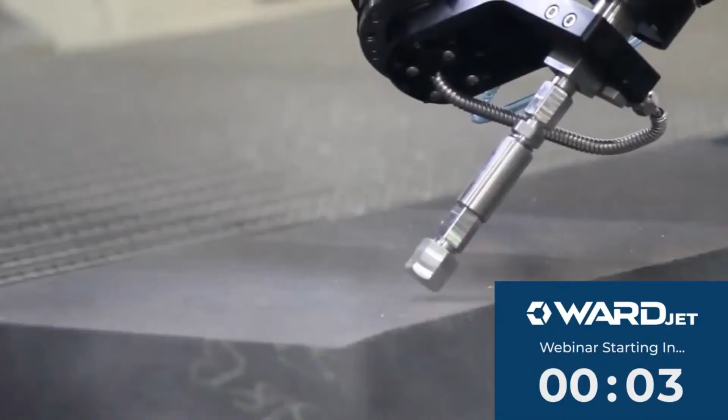Today's webinar is on WARDJET APEX-90, our most advanced bevel cutting solution designed for manufacturers dealing with steep angles, complex geometries, or demanding applications that push beyond the limits of traditional water jet cutting. Over the next 45 minutes or so, we're going to talk about what makes APEX-90 unique, where it fits in real-world manufacturing environments, and how it can help customers expand their cutting capabilities.

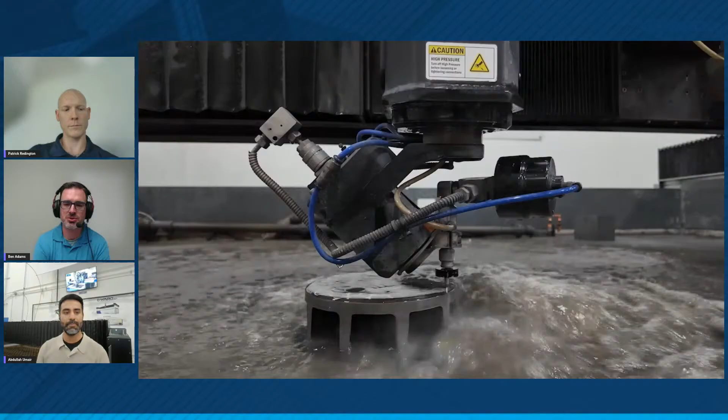So Ben, let's begin with the basics. For those who may not know, what exactly is APEX-90, and what challenge was WARDJET trying to solve when it was developed? We've done a number of 5-axis mechanisms. The APEX-90 is our most recent one for our most challenging applications. Over the years we've had a lot of generations. We occasionally on older systems would struggle with reach and parts that were large and had real tight angle cuts. The APEX-90 is our answer to that challenge.

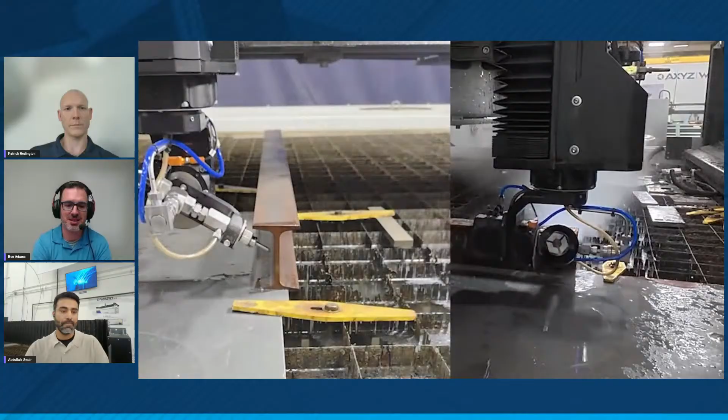So there it is on screen. APEX-90 can do a full 90-degree cut, so it can cut horizontally. It's available on carriages with extra throws, so you've got extra tall parts. If you have overhung parts, you got to get underneath the flange. The APEX-90 is uniquely designed to reach into those hard-to-reach places and cut things that none of our other heads, and a lot of heads in the industry, just can't reach.

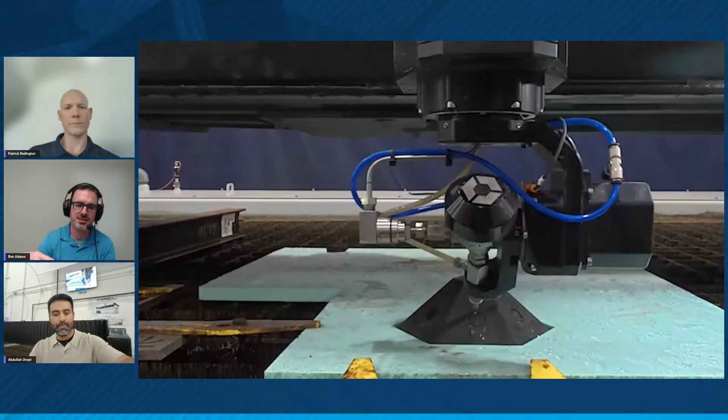You mentioned it's capable of cutting angles up to 90. Does that have any implications on the work envelope? It does. The APEX-90 is unique among our 5-axis heads in that it's got a wrist pivot, so it will pivot the cutting head out. When you get all the way over the edge of the travel and want to pivot back into the work envelope, there's about a 6-inch zone where the tip of your nozzle is now 6 inches towards the middle of the machine. So unlike an APEX-60, where you don't really need to think about it, you'll need to make sure you have a little room around the edges so you don't mount your part all the way to the edge where you can't get all the way around it. Generally, you're going to want parts more centered on your table for an APEX-90 application.

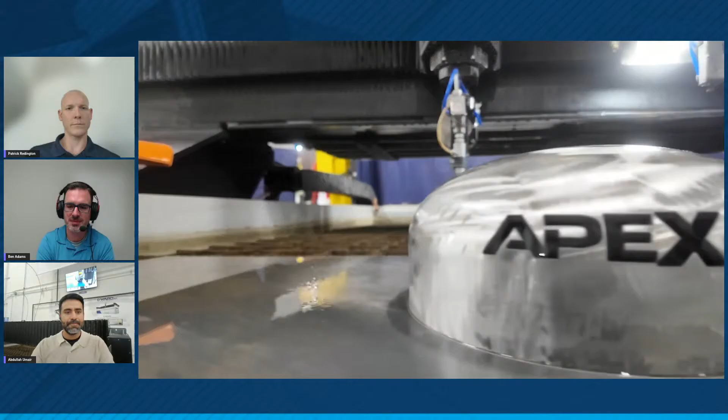So which machines is it available on, what series? The APEX-90 is on any of our M-Series machines, from the 2.5 by 2 meter small ones all the way up to a giant 15 meter long machine by 4 meters wide. Any of those can take APEX-90, and they can be stretched vertically as well if you have an extra tall part, or maybe a mold trim application where you need to get underneath a part larger than your normal 12 inches.

So customers who currently possess M-Series, can they retrofit an APEX-90 on? Yeah, absolutely they could. We would talk about your application, because it generally takes more Z travel to reach your parts. We would come out with a carriage and talk to you about lifting your gantry up a little bit to make sure we can reach all of the part you need to reach. So you might need a 6-inch lift kit or so if you take off a normal 2D cutting head and want to go to an APEX-90, but that's easily done.

So as a product manager and engineering manager, what applications immediately come to your mind when somebody asks for APEX-90?

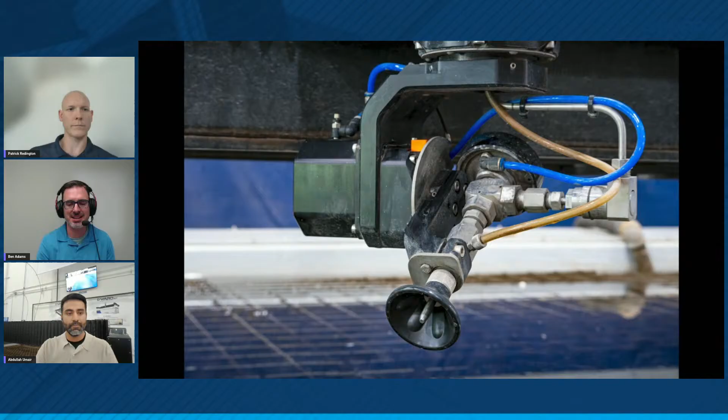So often these fit a few areas. Aerospace is popular, military applications, defense. There's a lot of parts there, castings, large metal parts. Also, I mentioned earlier mold trim. If you're demolding a part, you've got some flash, maybe some complicated mold lines that hit all sorts of odd angles, and you need to get over to 90 degrees in part of it, or reach inside some tough to reach places. A lot of mold trim applications are popular as well.

As we all know, cutting with WaterJet there's a little bit of taper. Is it capable of taper angle comps or tack? It is, yeah. It'll hit any angle from plus or minus 90 degrees, so if you wanted just a slight angle for taper comp, it'll do that, yes.

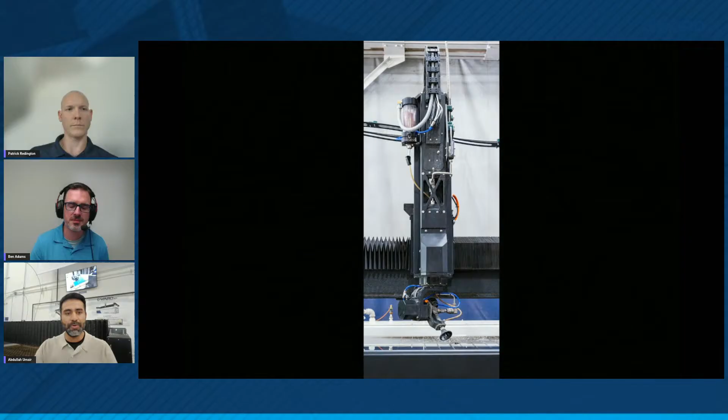Our audience may compare APEX-90 with APEX-60 or Infinite Winder. How do you differentiate those? So the Infinite Winder is a previous generation. Those applications are largely replaced by the APEX-60, which we're currently offering. The APEX-60 head is designed specifically to do taper compensation and bevel cutting on flat plate.

So it doesn't have that wrist pivot, right? It doesn't have any of the lost motion. There's an image - so you don't have to think at all about your work envelope. And it's great in those applications, but because it doesn't have that wrist pivot, it can't reach some of those hard to reach places. So the APEX-90 covers everything that the APEX-60 doesn't. If you need to go past 60 degrees, or you've got a part that you just don't have the reach you need on the APEX-60, the APEX-90 is the way to go.

Very nice. Patrick, would you like to add to that?

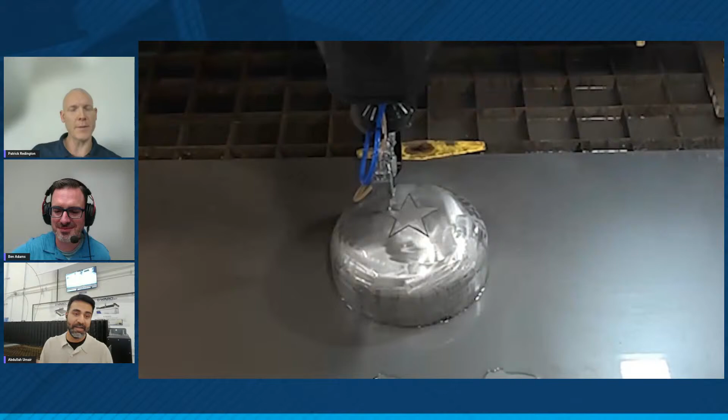So really, obviously the differences between 90 and 60, it's really going to be application specific. I really think the question is going to be either what you are currently doing in-house, as well as what capability is needed. Bringing a WaterJet in-house in general can be advantageous in a lot of different ways to either innovate your current process as well as bring in new parts. And with that, when you're going into 5-axis as well, it really opens up the door for a lot of different options. We have a lot of customers who bring WaterJets in-house, bring 5-axis WaterJets in-house. And I think going with the 90 versus the 60, or vice versa, is just really a question of what you're currently doing, what your current needs are, and what you want to do in the future.

All right, that really clarifies the innovation behind it. So Patrick, now Ben has walked us through what really APEX-90 is. Tell me, how would you position it with a customer, someone who's looking for 5-axis capabilities? How would you start a conversation on that?

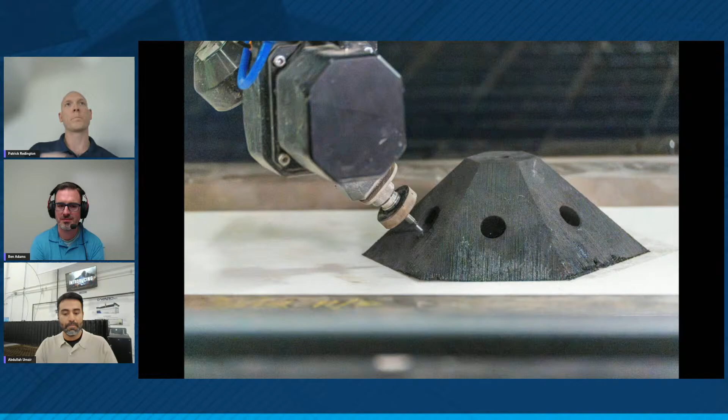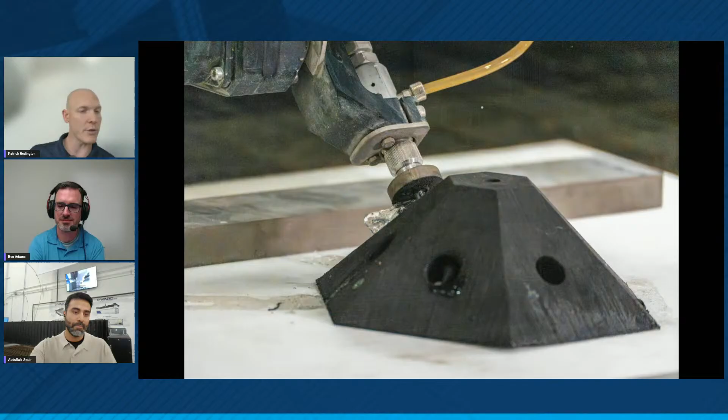Well, really, if you're looking for a 5-axis: one, do you currently have a part that you need a 5-axis for? Two, what's the angle that you need for the 5-axis? And three, what are you trying to do with the machine? Are you looking to specifically get into a niche where you're going to need 90 degrees, or you currently have a product that you need 90 degrees versus 60 degrees? And I guess the real question is, what are you cutting? What do you need to be cutting? And where are you trying to go with it again?

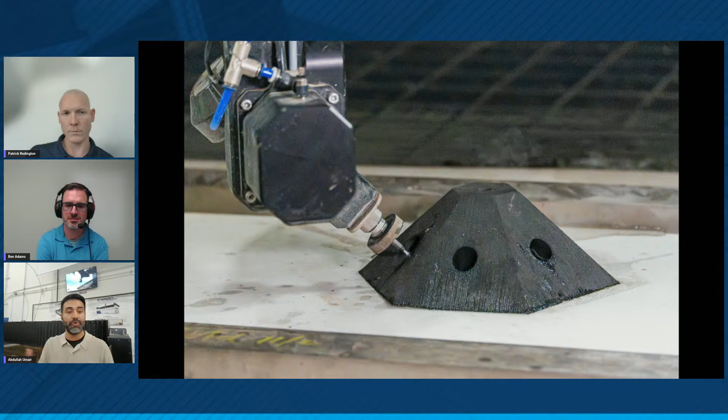So do you see on the field, talking to customers, people purchasing APEX-90 for their existing or current workflows, or are they looking to future-proof their business? Just kind of prepare themselves for more complex jobs down the road.

I'd say it's about a 50-50 split. We currently have customers who have innovated their in-house process already by adding an APEX-90. For instance, Ben touched on a little bit earlier about stamping and molding, oil pans - there's a lot of places that over the years a WaterJet head couldn't get into to cut at 90 degrees. So we have quite a few customers that do that currently with our heads at 90 degrees. And then, yeah, there are a lot of customers who are looking to bring stuff in-house, currently bidding on jobs or have recently won a job that needs the capability of cutting 90 degrees.

All right, so I've also asked this question already.

I've posed this question to Ben, but I want to get your insight as well from a sales perspective. Which industries are more gravitated towards the Apex 90?

I'd say the three big ones right now that I'm seeing are aerospace, defense in general, just because it's a very long list of parts that they need to cut with a lot of different varieties of materials, and automotive. Automotive has a lot of odd shaped parts, whether it's oil pans coming off a press or a stamp. With that specific application, they need a small compact head to get inside of the pan to cut the holes they need in the molds. That's also a very large one for 90 degree capability—there's a lot of car parts that need that capability.

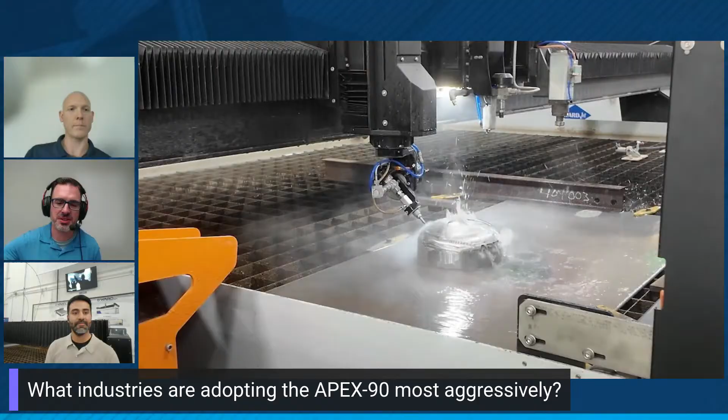I'd add weld test to that. That's an application we see increasingly—a lot of robotic welds need to be qualified and tested. They'll take a robotic weld and cut out a little coupon. This is great for reaching those kind of places.

The other one that's popping up a little more, I'd say, is oil and gas—a lot of flanges, pipe work, that sort of thing. That's a great application for the Apex 90 if you have a vertical pipe with a flange at the top and you need to get underneath it to cut a little fish mouth in it or something like that.

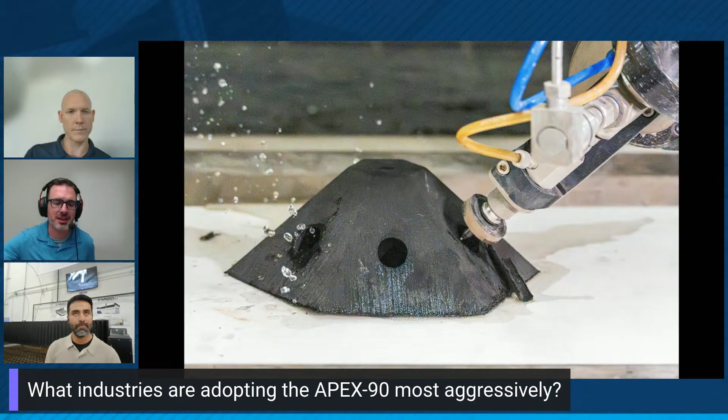Oftentimes with molds, there are small ones as well, but talking about mold trimming—can you have the part on the floor? This machine has a tank, but is there a possibility of mounting your part in a fixture on the floor and then doing the trimming? How would that process look?

Yeah, for sure. We have some customers with very tall parts, and they either need to water jet the whole vertical length of it, or maybe just a piece at the top, but they need to stick it somewhere. Obviously the tank is of lesser use if you're cutting at 90 degrees—you're not intersecting the tank. So we do have some customers that will put fixturing on the floor.

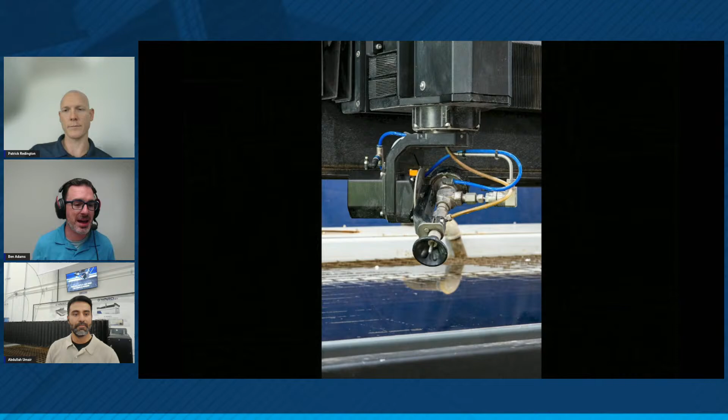The nice thing about the M-Series is the tank is totally independent. You could order an M-Series from us and cut 80% of your jobs on a tank that covers half of your travel. In the back half, you could leave some forklift access, or have no tank at all, trench your floor, whatever you want. Then just bring in those large, tall parts—maybe that's 20% of your work or 50% of your work. When you need to, you can come in there and gain access all the way around a large work area. That's totally unique for most water jets to be able to do.

So customers who need a tank can have that and purchase a longer rail—it's not limited. Since the tank is separate, you can have a mold or fixture mounted onto the floor for your taller parts, behind the tank. You can have the best of both worlds on the M-Series.

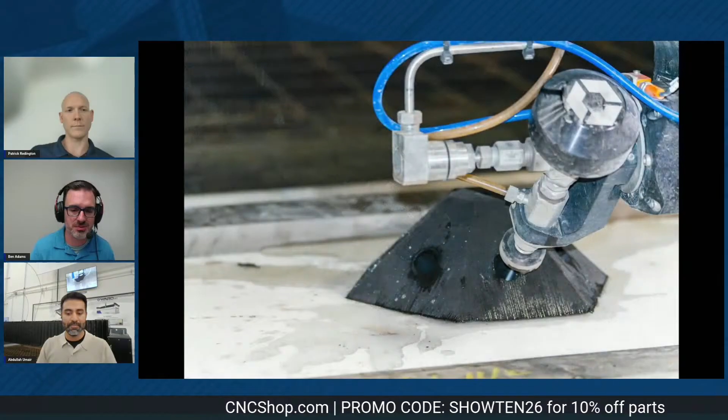Maybe you only do 2D cutting and do that over a tank in the front—the Apex 90 is going to do just fine with that. But you have these low volume or high profit jobs you want to be able to do in the back, and you can drive them in the back and do them there too.

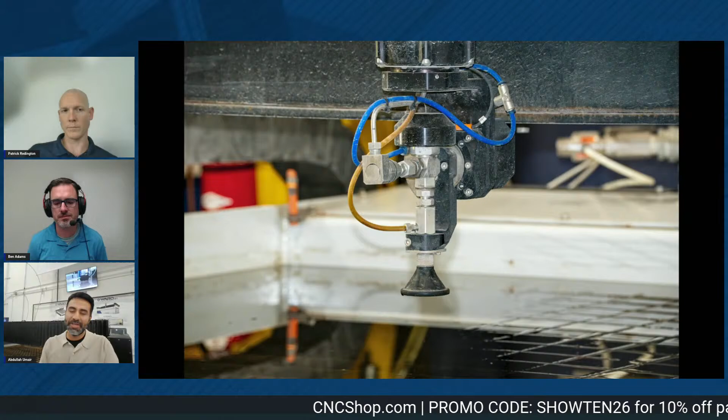So Patrick, tell me, when you're talking to a customer, what questions are they asking that really make you think the application the customer is defining is really an Apex 90?

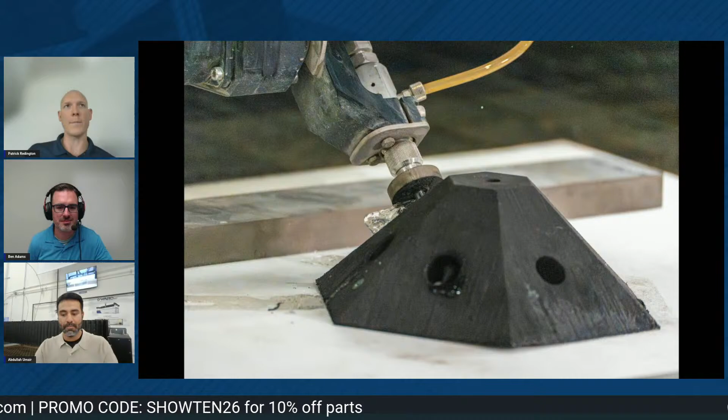Angle, obviously—angle is going to be the big one. Constraints, and I think the end road it always leads to is: what can and can't I do? That's ultimately the question. When you're talking about an investment, especially in 5-axis, what am I paying for, and what are my limitations moving forward? I generally give the same answer—obviously you're going to have a material constraint with water jet cutting in general. Heat tempered glass is the only material I know of that no water jet can cut.

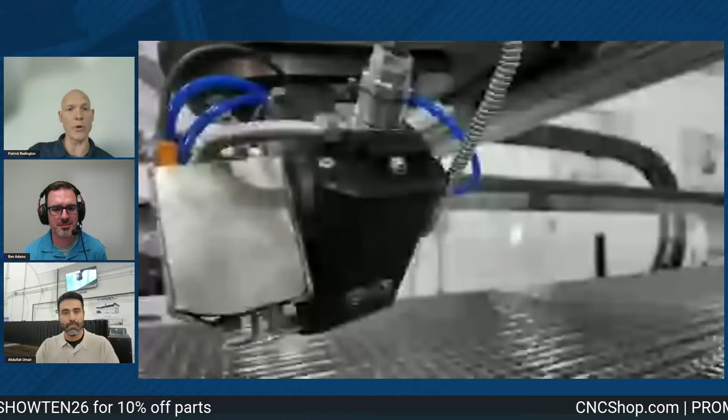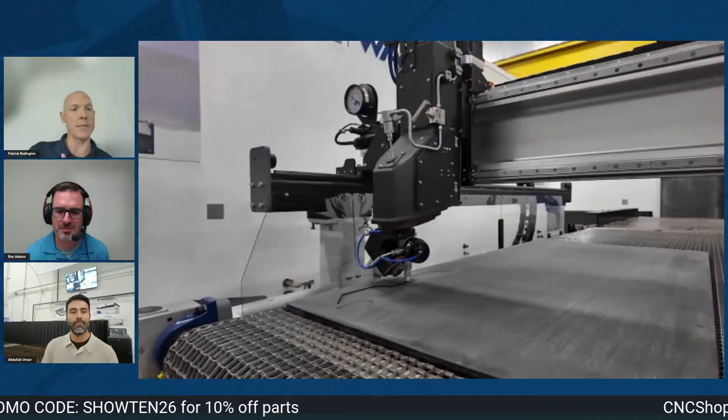The second consideration is going to be space, as Ben touched on earlier. As you're tilting the head, you're going to run into a little bit of an envelope restriction, just for safety concerns, as well as going into the side of the tank, the front of the tank, and so on. So we need to make sure the machine we tailor for you on the M-Series is big enough to handle the material. And lastly, going back to angle, what's the max capability I can do? With the Apex 90, we can go up to 90 degrees.

All right, so we've talked about what Apex 90 is, where it fits, and the kind of application it was designed for. I want to touch base on the programming aspect of it. So Ben, what can you tell us about the part programming? Which CAD/CAM softwares do you use, and how easy is it?

Yeah, so you'll almost always use iGEMS for an Apex 90 application. Ultimately, we read standard G code, so if you have a preferred method, you can do that. But iGEMS is really fantastic. It'll handle all the WaterJet process concerns that you have, and it'll also simulate the entire application.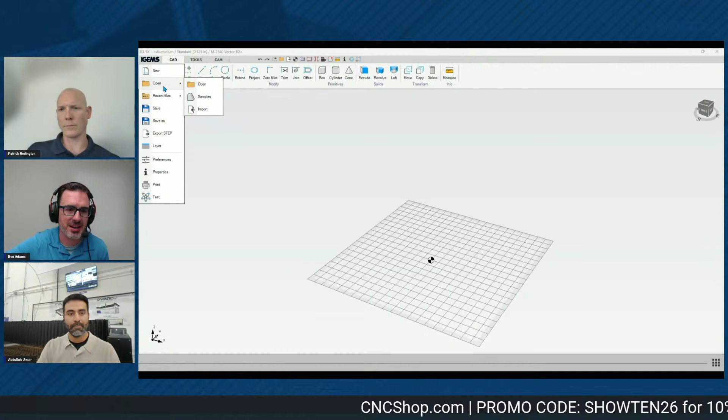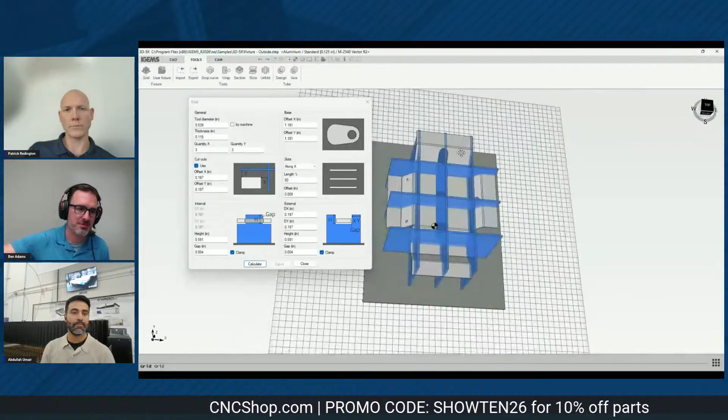Patrick was talking about vetting a project for APEX-90. The less flat your parts are, the more likely an APEX-90 is going to be a good answer for you. This is a good example here - it's got some bends. If you're trying to cut it in situ this way, it's not always obvious where the back end of your water jet is going to be pointing while you're water jetting. So if you've got bowl-shaped parts and things like that where you might have clearance issues, we can run this through iGEMS and show you a simulation. You don't need a real machine to even see what this is going to look like, and it'll tell you exactly where you're going to have clearance. iGEMS is really fantastic software, and it'll take you all the way through with very little effort.

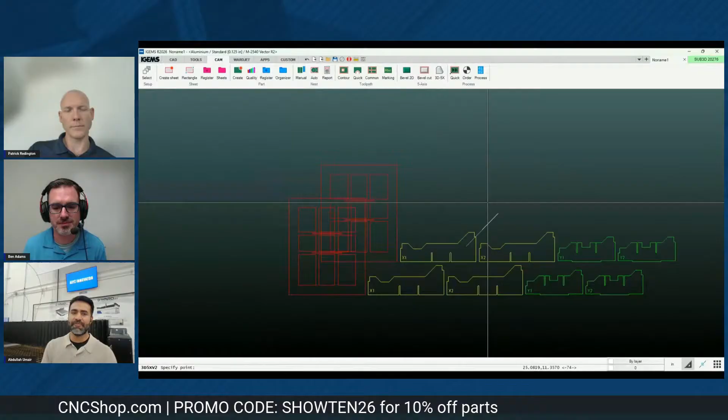All right, so tell me about the onboarding process. People who have not used or only do 2D work - how easy is it for them to program 5-axis jobs?

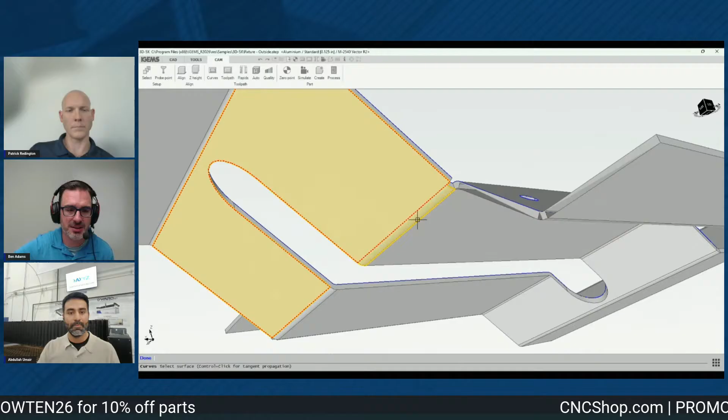It'll definitely be an extra step. There'll be a couple things you're not used to - you're going to work more in 3D, you're going to be working with solid files instead of maybe flat DXF files. That might be new to some people. But really, iGEMS makes it very simple. I mean, it's all visual. You bring it in - we're getting a good example here.

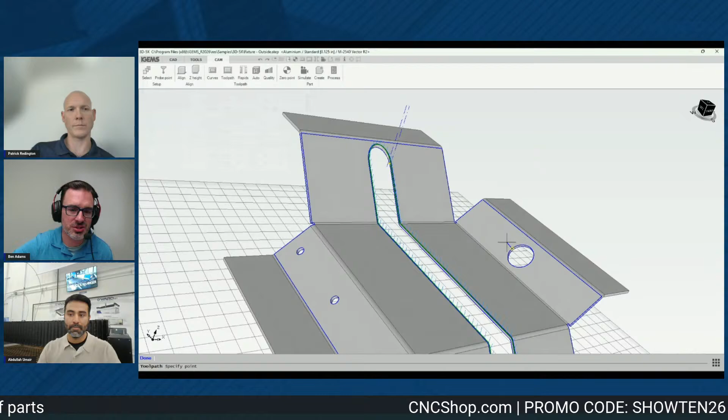And this is part of our training process. So we offer training on all these. If you end up with a machine with an APEX-90, someone from our applications team will be happy to go through and make sure that you're comfortable and familiar with all of these features.

All right, so there is a learning curve, but not as steep, right? No, yeah, and if you've explored 5-axis cutting on a WaterJet maybe 10 or 15 years ago, you'll be blown away. It is fundamentally different than it was. The advances in software are astounding.

Some of the earlier applications that I worked on were frankly kind of a bear, which is good if you had one of those machines - you didn't have a lot of competition. But you really had to want to do something pretty badly to get the program to do it, or you were sitting there sort of programming it step by step, walking through making your own G code, kind of teaching it as you go.

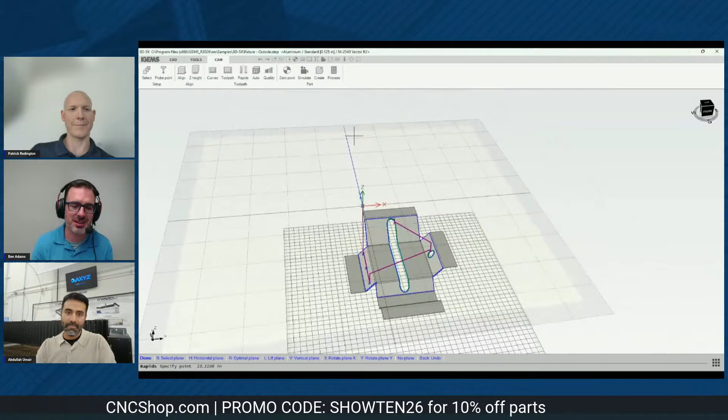Those days, thankfully, are long in the past, and iGEMS is going to get this all set for you. You're not going to be spending days out there worried about crashing your nozzle into your workpiece or whatever. So if you set it up with good models, if your parts match the digital models that you have, it's going to be much, much easier than it used to be.

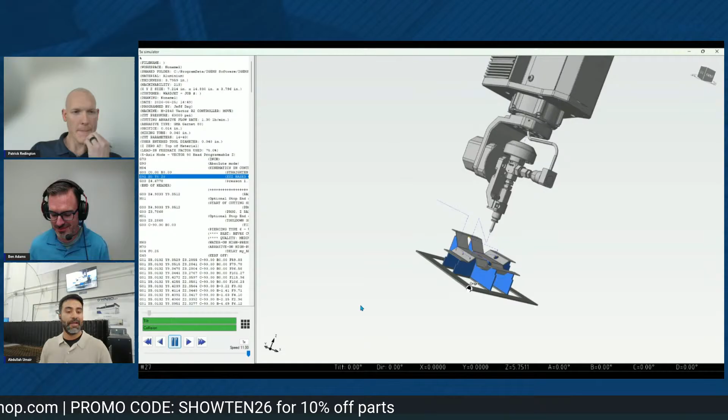Very nice. So we've talked about evaluating the program, and anyone out looking for a cutting technology - capability is not the only thing they consider.

So maintenance and what it's like to own is another topic. Patrick, what can you tell me about the maintenance aspect of it?

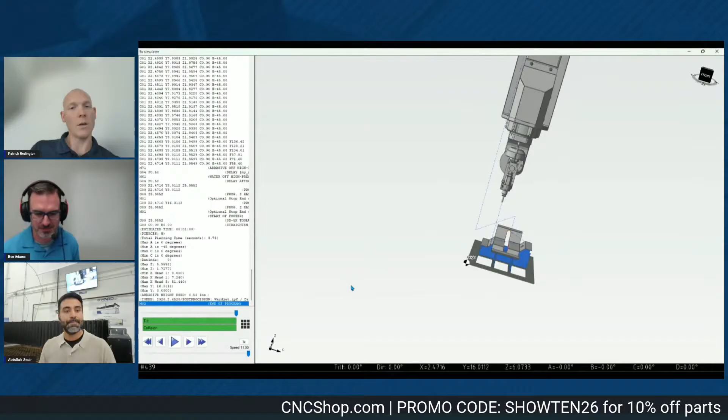As you can see here, even in IGEMS, everything is pretty wide open on the APEX-90, very accessible, very easy to get to. You're going to have the same WaterJet consumables you normally would: orifice, nozzle. If you're going water only, you're just going to have the orifice. You're going to have some more stainless steel components, and obviously with 5-axis and needing the capability to rotate and turn the head, you're going to have some extra high pressure components.

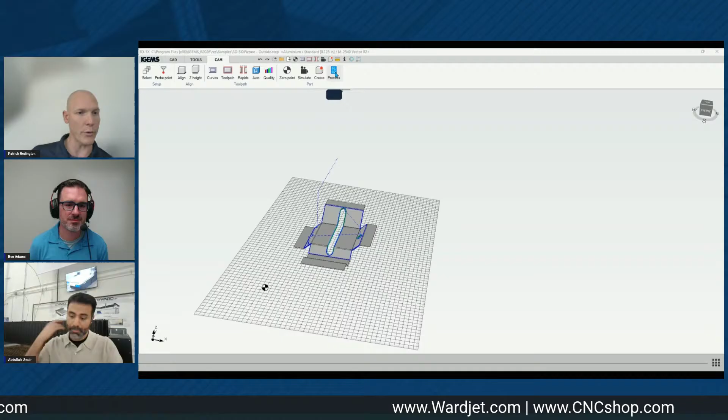As for the maintenance aspect of it, you're going to have your regular maintenance with consumables, orifice and nozzle, and the only things you're really going to add on for regular maintenance are some high pressure lines and some high pressure swivels. Outside of that, mechanically, you're going to have some motors to control the axis and things like that, but that shouldn't be your everyday maintenance item.

Ben mentioned that with a nozzle, it goes into tough areas, and you can even preview the 5-axis job to know exactly where it's going to be cutting. For those accidental collisions, Ben, how would you recalibrate the unit, and where can you find the nozzle parts?

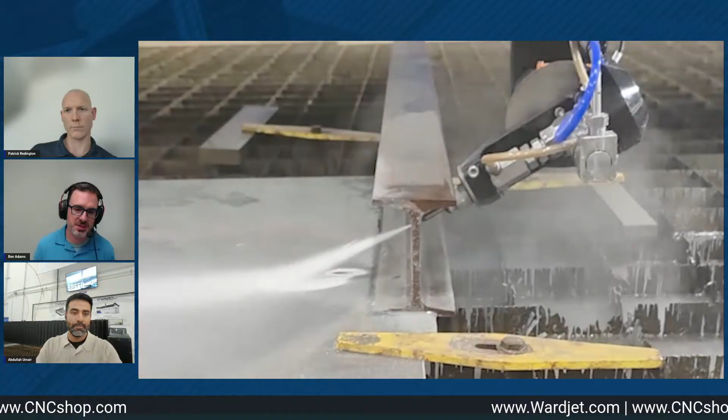Yeah, so we calibrate everything in the factory, of course. So when it comes new, it's all set up, good to go. But if something does get dinged or slides around on you, whatever, the calibration process is pretty straightforward.

It just involves you taking the nozzle out. There's a tooling ball that goes in place there, and through a dial indicator and a series of programmed moves, you can tilt the head back and forth and take some readings. The controller is going to do all of the math, making up for any tool length difference or angular offsets you have. It's pretty easy to get squared back up true to the machine and back to cutting parts again.

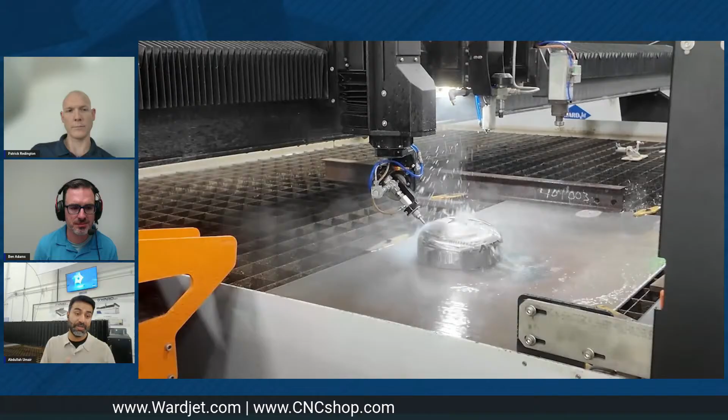For the consumables and nozzles, anything else for WaterJet needs, where can you purchase these parts? Like you said, it's pretty easy to change the nozzle, so a customer would want to purchase it from somewhere. Can you tell us a little bit more about where they can get these parts?

Sure, yeah, you get all the parts from CNC Shop, just like you would for a 2D water jet, and most of these parts are the same. It's going to be the same orifices, same nozzles. If you're already buying there, it's going to be the same parts you're already used to.

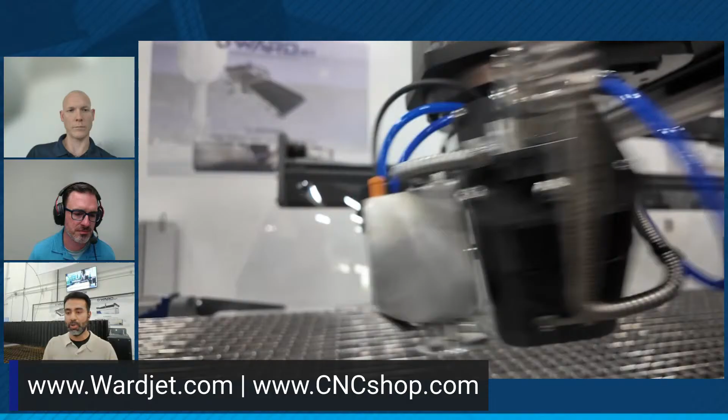CNC Shop, you can stop there - it's basically a one-stop shop for all your CNC needs. You can buy all your consumables, nozzles, parts, whatever you need. CNC Shop is the way to go.

I forgot to ask you one more question. How often do you need to calibrate it? There's calibration, but is calibration required monthly, weekly? What are we looking at?

It'll depend on your application. I'd say monthly is definitely as much as most people do it. If you have a very tight tolerance, you may want to do it more often just to check. We have some customers for whom that's their Monday morning routine - they come in and calibrate it whether it needs it or not. But monthly or after an event is probably adequate for most people.

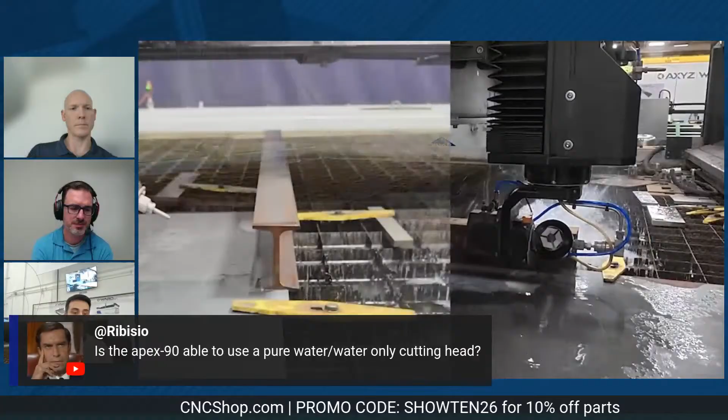Very nice. I would like to bring in a question here from one of our viewers: Is the Apex-90 able to use a pure water only cutting head?

Yeah, absolutely. We would swap that nozzle out and we would put the orifice down closer to the end. That's great if you've got, especially like mold trim applications where pure water cutting is the best way to do that. Absolutely, very nice.

So while we give a chance to our viewers to put some more questions in, I have some of the questions we've been hearing customers most commonly ask. The first one on my list here is, what if my parts are taller than 12 inches? Can I get an Apex-90 to cut them?

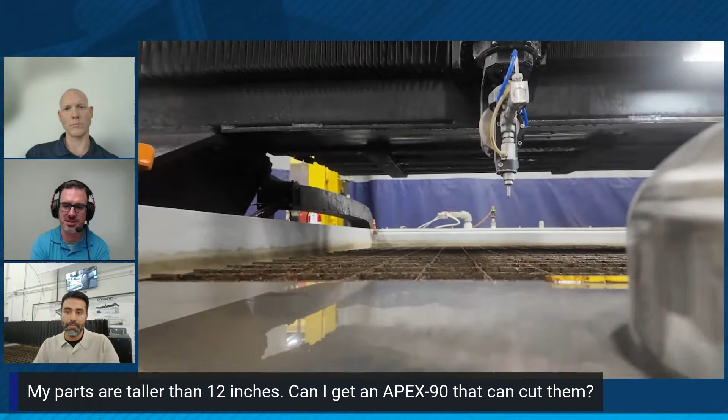Yeah, absolutely. That's one of the great things about the Apex-90 - we make them in different stretch lengths. 12 inches of travel is the standard, and that 12 inches to us means I can cut at vertical or 90 degrees through an entire 12-inch window. It actually moves more than that, but if your parts are taller, we just stretch that entire Z mechanism. So you can do 24, 36 - we've even quoted 48-inch travel.

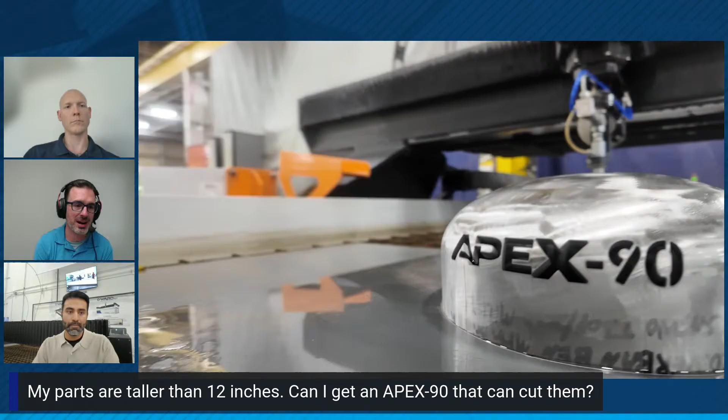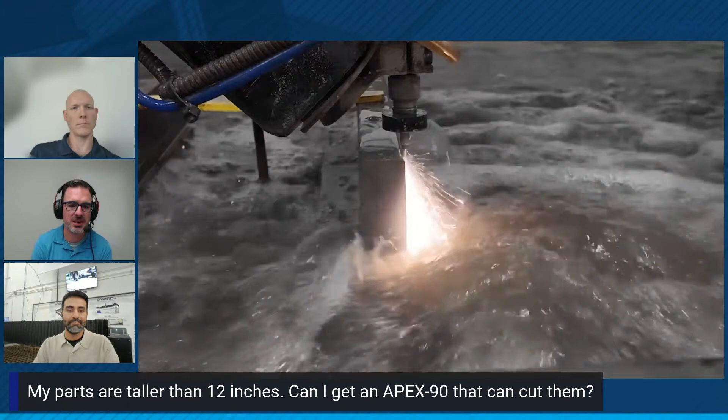Getting back to removing the tank at the bottom of the floor and reaching down low, you could have a 48-inch tall weldment that you want to cut windows out of the side of, and we can reach all the way down the side of it. When that Apex-90 rotates out, it's important to note that it's now sticking out from the ram, so you can go all the way down and there's nothing to foul vertically with your part there. That's one of the main things this was designed to do, is reach out beyond its own carriage travel, so you can do a long vertical cut.

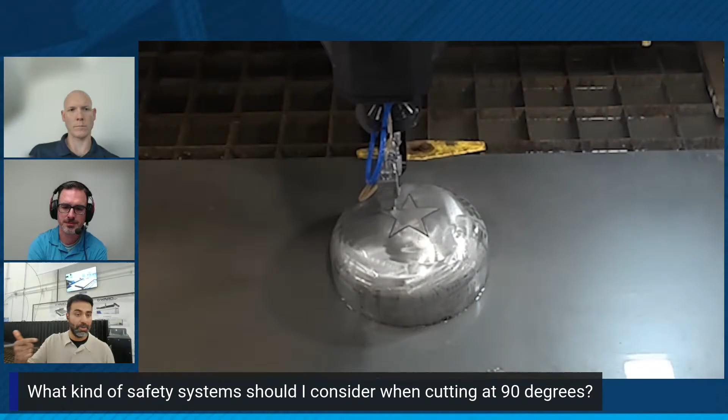What kind of safety systems should I consider when cutting at 90 degrees or steep angles? What kind of systems does it come with, or what should they consider if they already have a machine and are looking for Apex-90? Obviously, if you have a cutting head that's capable of pointing horizontally, you do need to be more concerned about the safety aspects of your machine and how it's all situated.

The best way to do this is to put up some hard guarding. You can have a keep-out zone about 12 or 15 feet away from the waterjet, knowing the water jet stream is not going to be coherent at that point. But it's still going to be wet, it's still going to be noisy, it's still going to be a place you want to keep people out of, and it's still added risk.

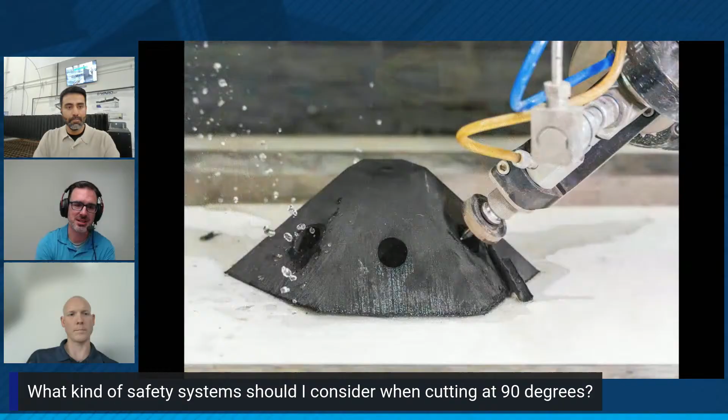So most customers with a dedicated application like this, a mold trim, will put the entire machine in a room, or have some movable doors, maybe a quick roll-up door with safety interlocks that we can tie into our system. That's what we'd recommend for most applications, some sort of quick access door. Maybe you drive your parts in with a forklift, or swing in a jib crane. Close the doors before you do it and put the controller on the outside - that's a great way to do it. We have a number of options and are happy to talk about safety features and methods, but that's the simplest, easiest way to ensure a safe working environment.

So you mentioned automatic doors - can these be retrofitted after the fact? If a customer already has an M-Series, can they, after purchasing Apex-90, or even if they're just considering safety, have these added onto their machines? Yeah, certainly, we can install vertical automatic doors on any of the M-Series that are out there.

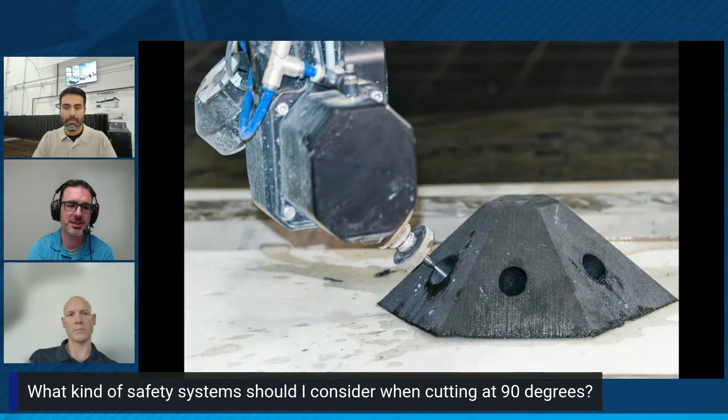What's the most impressive application you have seen by far? So this is two parts - Ben, from your perspective as a product manager, and Pat, I'd like your input as well from sales. Boy, most impressive... the most impressive one I can talk about publicly, probably.

This wasn't very practical, but one of our earlier 5-axis mechanisms, we had a 90-degree application. We bought a junked out car and actually drove it underneath a waterjet machine - a great big machine with 5 feet of travel. It was large enough that we could drive the car right underneath there, and we turned it into a convertible, cut the entire roof off. Most of it was 90-degree cutting. I'm not sure you'd want to drive that car afterwards - I'm not sure that's the application, but that was, I think, the most fun one we've done.

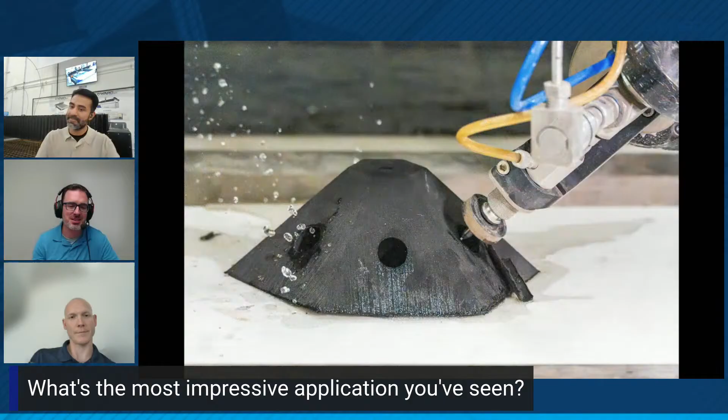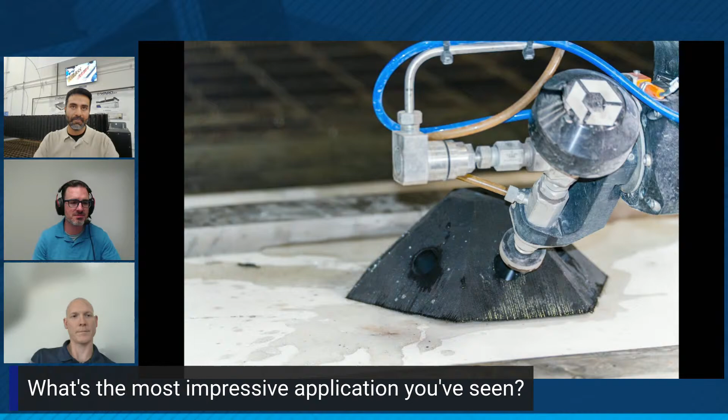The other ones are impressive in that they are things other waterjets can't do. An M-Series with an Apex-90 is almost a different class of machine - it's not what you'd typically see in a job shop. I've seen people cutting huge bearing rings for windmill bases, large roller bearings maybe 6 feet around, where you can get in there and cut pockets for all your roller bearings. I've seen recycling applications where people have stainless piping and are cutting out mesh sizes for recycling - some really good ones out there. Oil and gas, large fiberglass piping that needed cut at angles. So there's a lot of them out there.

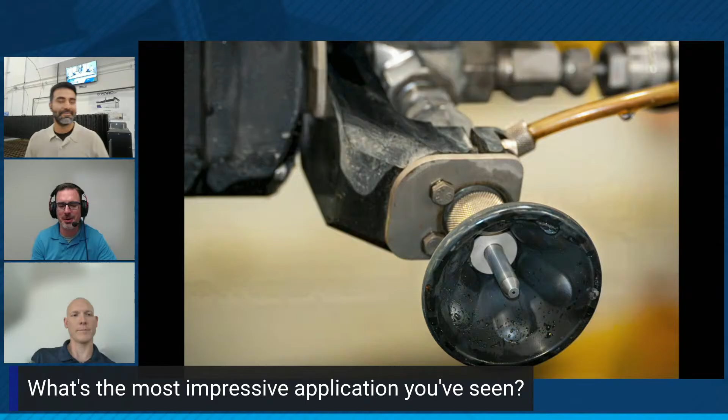Am I missing any, Pat? Did you do any fun ones?

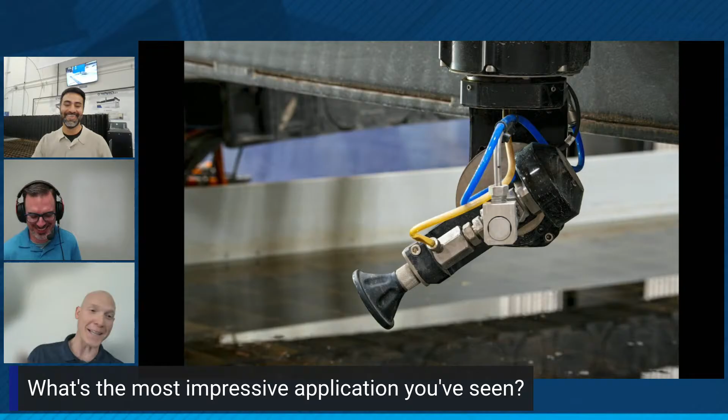I just want to second, the turning the car into a convertible video is on our YouTube page. I love watching that video. Yes, I absolutely would not drive the car afterwards, but it is really cool to watch. That was a fun one.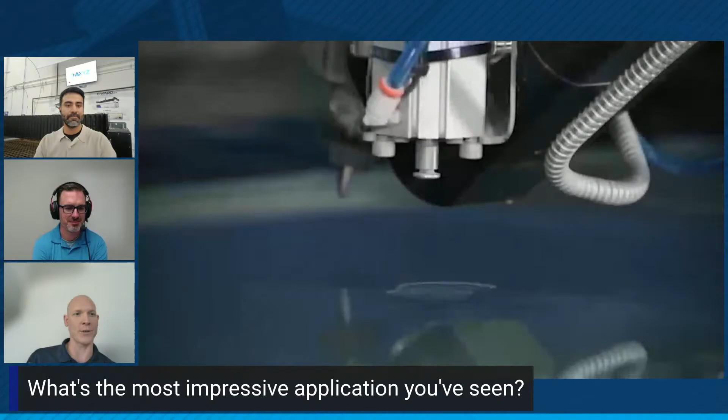I'd be very interested to do it today in iGEMS. I think it would be 10 times easier, maybe 100 times easier than it was 5-6 years ago, to be honest with you. I think what we have now makes it light years easier, but those are always fun.

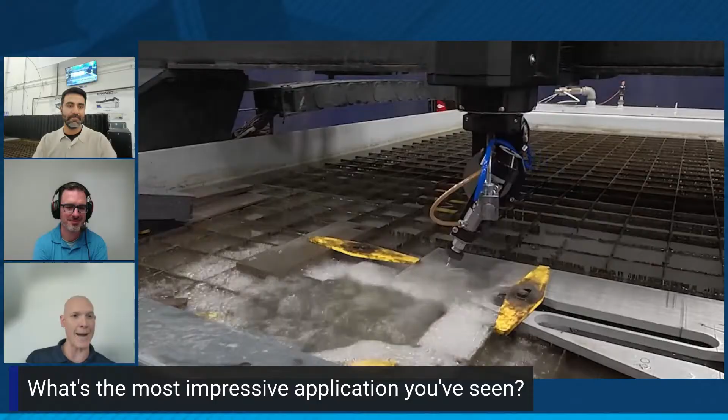Some of the fiberglass parts is a good one, but I think my favorite, just personally because I worked on it myself, was some of the oil pan stuff we've done in the past. Getting the head inside of the pan and then being able to pivot and move without running into anything. It's intricate, it's fun, it's complicated. At the time a lot easier now, but I really enjoyed that stuff.

Those are some interesting applications right there. So whenever a student asks me about a Waterjet or they're not familiar, I tell them we turn a car into a convertible. People often don't realize how big the machines we make can get, and that's a great example.

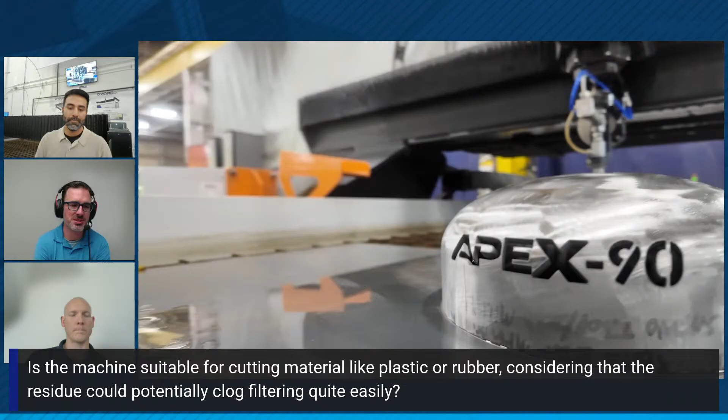Soft goods cutting, which I put plastics, rubbers, and foams all into, is really a strength of WARDJET. We do a lot of applications there, and we're well familiar with how to get rid of that residue and the floaty kerf material left over from cutting. We have a number of solutions for clearing your water overflow before it goes down the drain. A lot of that material you can't just dump down the drain, or you'll be hopelessly clogged pretty quickly. But that's work we've been doing for a long time, and we have solutions for that. Happy to go over this.

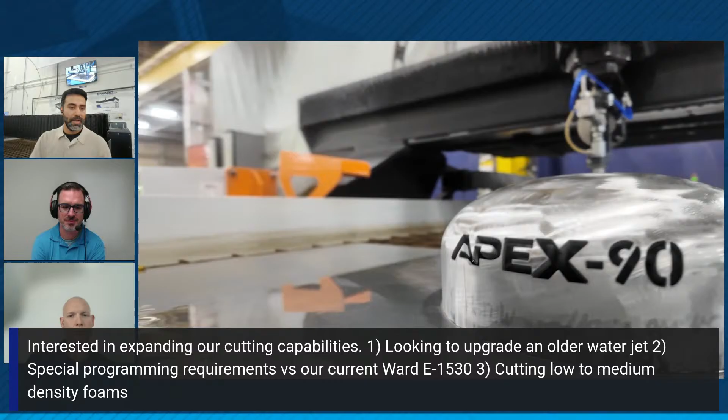Very nice. So next one here: interested in expanding our cutting capabilities, looking to upgrade an older water jet, wondering about special programming requirements versus our current WARD E-1530. Oh boy, that's an old one. Cutting low to medium density foams.

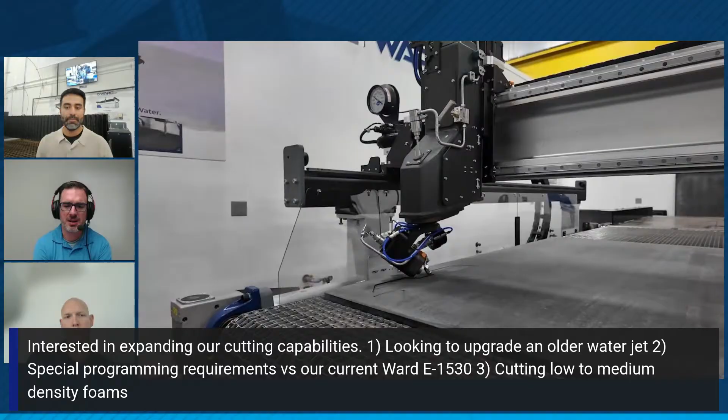Yeah, it'll program in a similar way. We already touched a little bit on the travel that APEX-90 is going to eat on the sides. So if your parts need 90-degree cutting and they're the full 1.5 meter by 3 meter parts, you may not get everywhere that you want to get, but if they're smaller than that, there's a good chance you can reach that. You could talk to our aftermarket team, they'd be happy to talk to you about retrofitting newer equipment and newer 5-axis heads onto legacy equipment.

Very nice. And high density foam, or medium and low density foam, similar to the previous question, not a problem at all. That's stuff that we do every day.

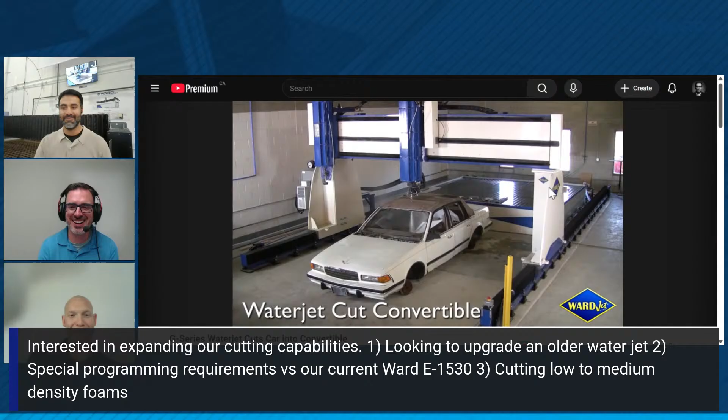Bread and butter. Oh, there it is. Yeah, there it is, there it is. I don't know whose idea this was, but I remember thinking at the time that it was silly, but I have talked about it more than I ever would have thought.

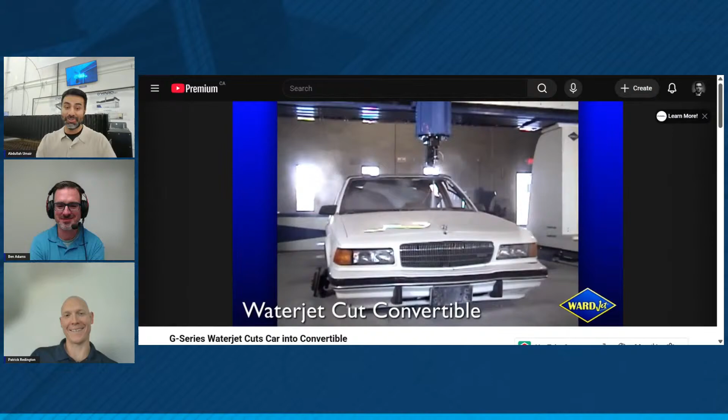That goes to show how massive machines can be, right? Yep, as you can see, it's separate, there's a tank right behind. That's exactly the application we're talking about. You have partially the tank, and then you can have a fixture for your molds. So there you have it, you look at the size of that machine, it's insane.

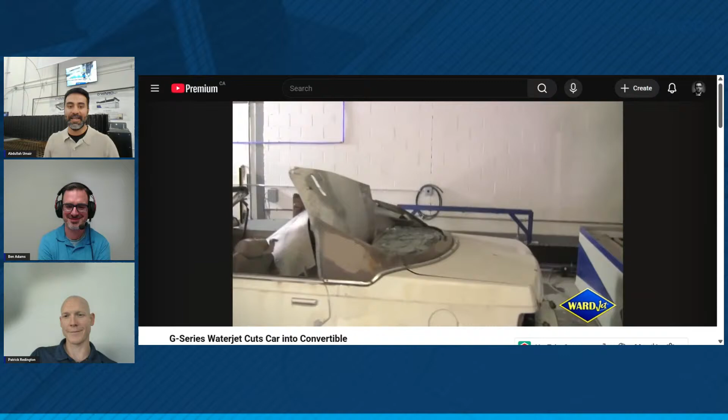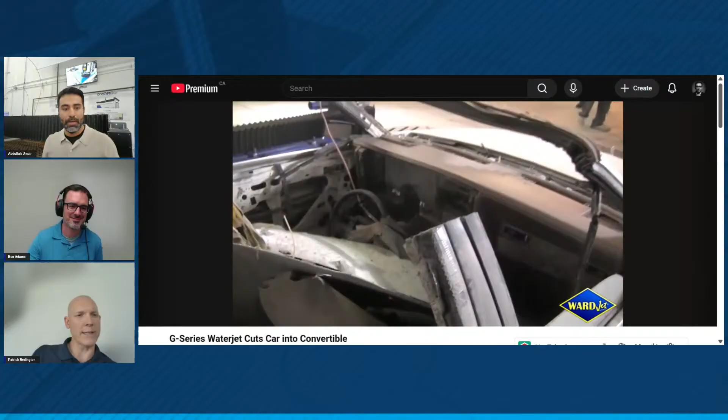I did want to touch on something we discussed about the safety systems as well, and integrating the safety systems. It's fairly easy for us to give signals to integrate with doors. We've done it plenty of times in the past.

Oh, you cut out, sorry. Mike, I thought it was me for a minute.

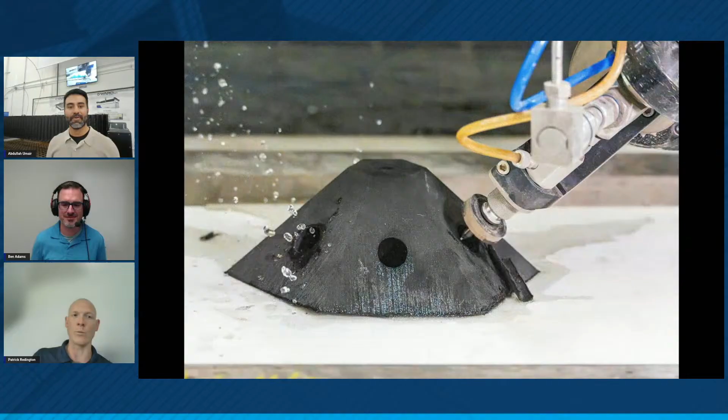No, sorry, it's me. A very quick question that comes up is with safety systems - if we're cutting 90 degrees, how safe is that? We can separate the controller into another room. There are a lot of things we could do to make it easy and integrate with your current room system. That's a strength as well - third-party automation.

That's something we've got a lot of in our history, and we're happy to talk about it. So if you've got a man door, light curtains, and an overhead door, and you want those all tied in, and you have to satisfy X, Y, and Z before you cut parts or whatever - those are all applications we've done in the past, and we've got a good team here that can put that all together and test and deliver it for you.

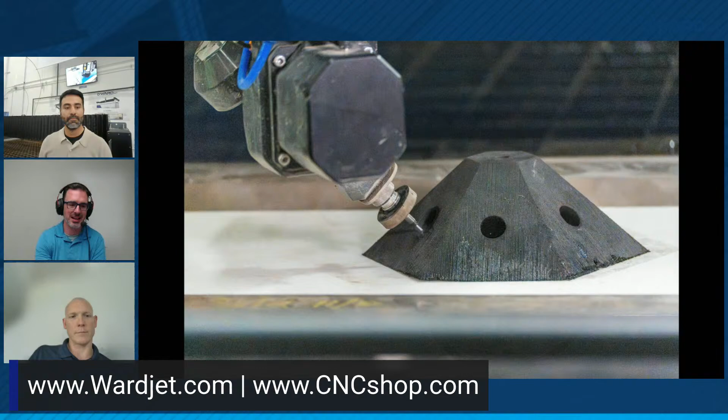Same thing with robotic loading, or you name it. If you've got to tie into some third-party equipment, and you want our equipment to talk to that, cut your part and then hand it over to the next downstream process - we love that kind of work. We would love to be part of an overall automation solution.

All right, seems like nobody else has any questions. That gives our viewers a great understanding and insight to not only what APEX-90 is capable of, but what it's like to maintain, own, and operate it.

Before we wrap things up, Ben, I have one final question for you and one for Pat. So Ben, we'll start with you - what is the single biggest misconception people have about APEX-90?

Yeah, I would say that it is difficult, right? And this comes from not that long ago - it was difficult. The amount of work you had to do to fixture a part, get it in space, and program it, and the number of things that could go wrong - that part tilts or twists or rotates or whatever.

That's all gotten so much easier with simulation, and the ability to take a digital part into iGEMS and program that part means you can set that part up and be cutting a part in minutes or hours instead of days. So things have fundamentally changed that way. If you tried it years ago and you kind of bounced off of it or struggled with it, take another look - it's fundamentally easier to do now.

All right, so technology has changed and we have progressed our ways. Always - it's way easier this time around.